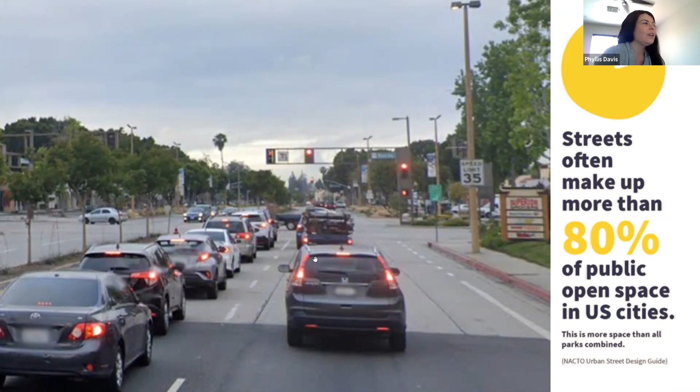But our transportation system moves more than just vehicles. It has the potential to foster economic activity, improve public health outcomes, serve as a front yard for our residents, and really just provide a safe place for people to get to where they work, play, live, and learn, no matter what transportation mode they choose or use.

So looking at our streets from a multimodal perspective, we're able to give people options so they can safely, attractively, and conveniently move by foot, by bike, by transit, by any type of mode that they see fit. But the street designs, policy plans, and recommendations that we develop ultimately affect how our communities are formed and how our people choose to travel.

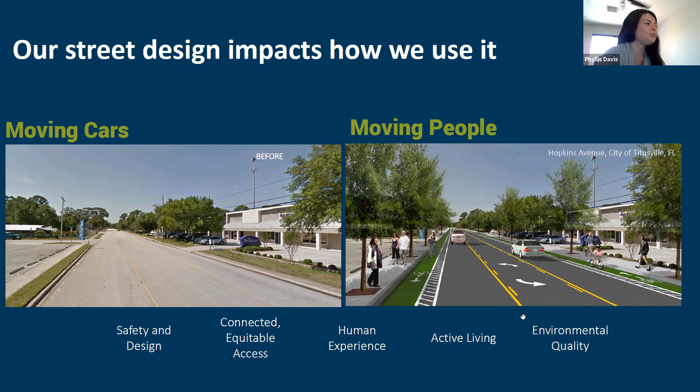By also shifting our focus from moving cars to moving people, we can also make our cities more efficient. When we look at streets, typically we measure how a street is performing by how many cars it moves. But if we shift our perspective to how many people we can move, we can start to reallocate the space within our streets.

Assuming that we have maybe 2 passengers in a vehicle on a single driving lane, one travel lane can carry about 600 to 1,600 people an hour, whereas a dedicated bus lane can carry up to 8,000 passengers per hour. So it's a very big discrepancy and difference in how many people you can move by what travel mode you use.

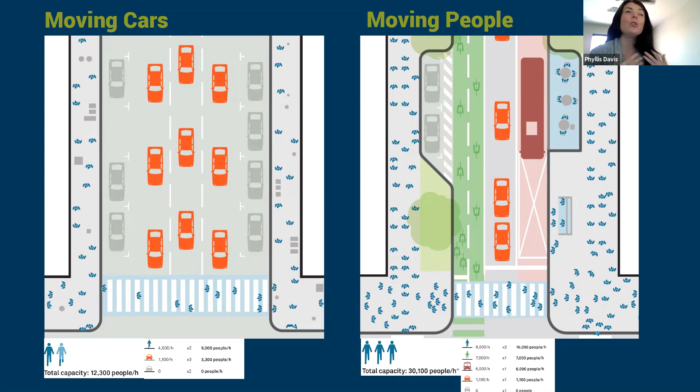So this scenario not only increases the capacity of the street, it also allows us to have more space for seating or amenities along the sidewalk. So maybe trees or plants or public spaces. And it's important to keep this in context as space in our urban areas is increasingly becoming scarce. We need to really rethink how we're using our streets to maximize the efficiency.

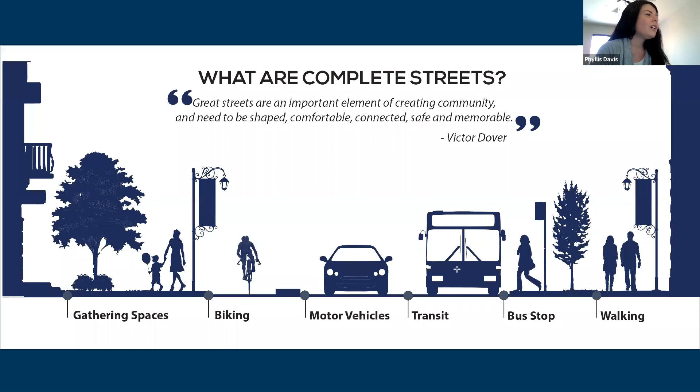Streets are also catalysts for urban transformations, but they need to be developed to the unique user and land use needs along a corridor. You'll probably have heard of the term complete streets. Well, complete streets moves away from that vehicle-focused design to really incorporating the human experience into the street design. It provides multimodal connectivity, but it also helps to improve the aesthetic, social, economic, and environmental needs of the community.

So what makes a street complete? The concept of complete streets is really placing the same priority on pedestrians, bicyclists, and transit as it does on motorists. It incorporates a wide array of amenities that improve access for all users, regardless of your age or ability. It really tries to create one cohesive space within the pedestrian and roadway realm to allow users to safely and conveniently travel.

But the context of a street is also crucial, and it's often overlooked when we're designing our streets. One size does not fit all when it comes to complete streets. So we really need to look at what the land use surrounding our street is and what the needs of the corridor are. So let's look at some examples of different scenarios of a complete street and how they're tailored to different land use contexts.

So it's really trying to convert that space to also provide access for other users. So we can prioritize pedestrian facilities, bike facilities, and transit facilities that really help all people move through that corridor.

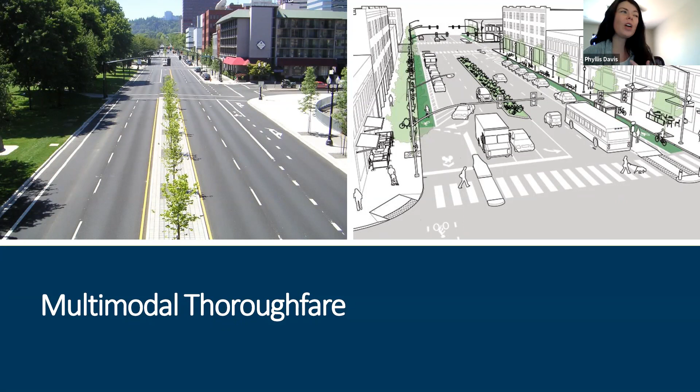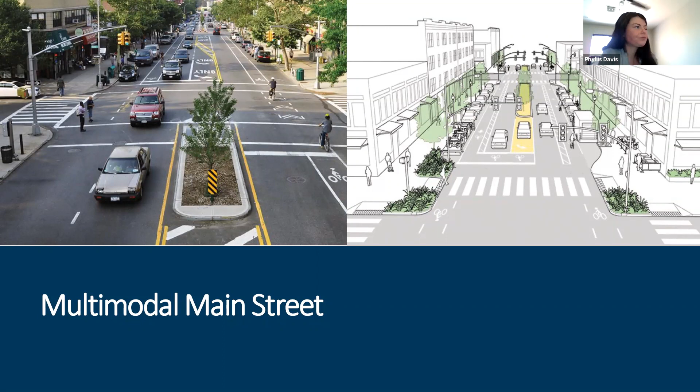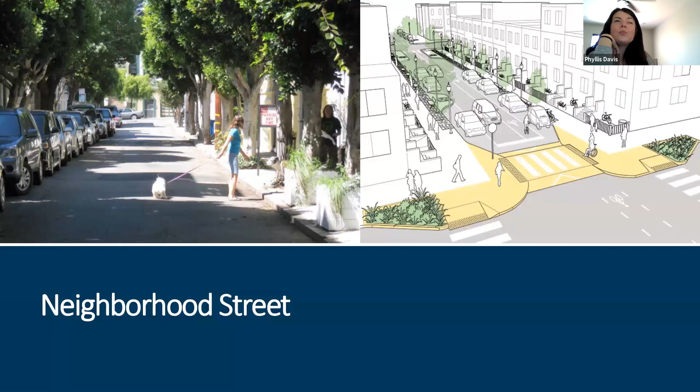There's also commercial alleys, shared streets, and paseos. These can be designed to play an integral role in really making connectivity easier for pedestrians and cyclists in the downtown area. Shared streets maintain vehicle operations through them by promoting just low speeds through the area. These could be used just for loading or unloading during designated hours. Another idea would be creating a pedestrian-only space. And I think there's a lot of opportunities to reconvert some alleys currently in Baldwin Park into these great shared spaces or paseos.

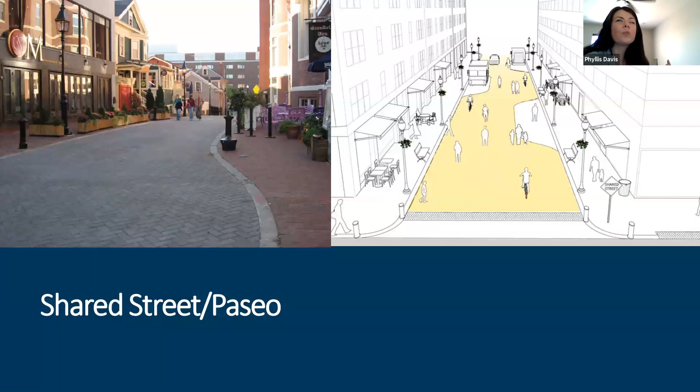But no matter what type of street we have, a critical element to looking at complete streets is providing equitable access to our residents. Vulnerable population groups such as limited incomes, the elderly, or persons with mobility limitations are more likely to lack alternative modes to vehicle travel. So that may limit their access to jobs, healthcare, social interactions, or healthy food. So creating access that is reliable and affordable can help address some bigger community concerns that we have, such as poverty, unemployment, and public health concerns such as obesity.

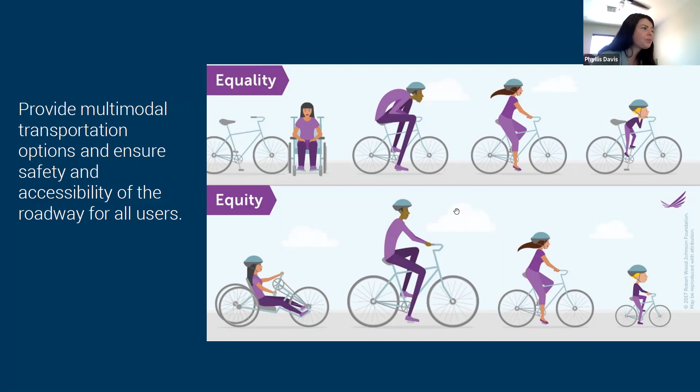And one of those key components of equity and having street connectivity is the overall design and how connected our network is. Well-connected streets bring destinations closer together, they reduce travel distances, they help improve access, and really ultimately they just create a better sense of place. So if you look at Baldwin Park today, Ramona, Baldwin Park, Pacific, and Main really serve as the backbone of our transportation system. But there's also a network of smaller streets that improve connectivity and access. But in today's current superblock development, there is some limited east-west access.

So, for example, if I live in that dot in the upper left-hand corner and I want to go to the retail shopping center, I have to either travel north to Clark or down to Ramona to drive to that retail center. It may not sound like a big deal, but during peak congestion periods, this just really adds additional stress to our street network. It also can potentially limit our pedestrian and bicycle access as well. So dividing these superblocks can really allow for additional movement through a downtown area.

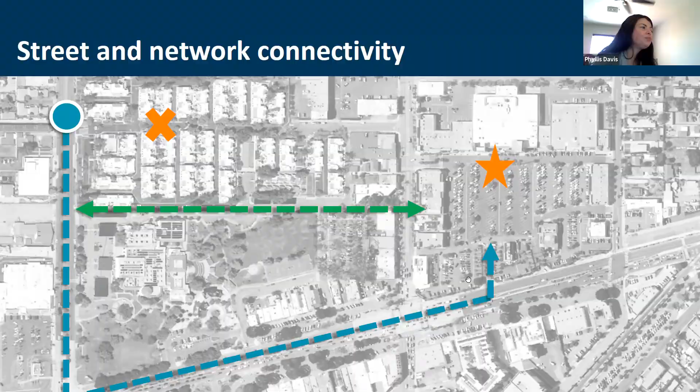Another great way to improve access is to use our alleys and streets. The alleys between Ramona Boulevard and the Metrolink station are a great example of how we can convert that space into a lively pedestrian alley that encourages and entices people to get off the train and to come to downtown Baldwin Park. Connections such as this help create a stronger grid-like system, and it just makes the blocks more walkable and helps promote urban development.

And even if a street is connected, we need to make sure that we are designing the streets to incorporate the safety of users and their perception of safety. How someone perceives their safety, whether walking, biking, or using transit, is critical to whether they choose to use that mode or not. For instance, if you're a confident cyclist, you might not be scared or intimidated to ride on a major roadway. Whereas a family with children, or honestly myself, requires a bicycle facility that has a little extra protection, safety, or comfort.

So selecting the best bikeway facility on a given road can be really challenging, but we look at a range of factors that influence a bicyclist's level of comfort and safety. The image on your screen shows a continuum of different types of bike facilities, from least protected on your left to the most protected on your right. The shared lanes on your left can be used on streets that have low volumes or low speeds. So really in Baldwin Park, we're looking at those neighborhood streets, or just low volume, low speed streets.

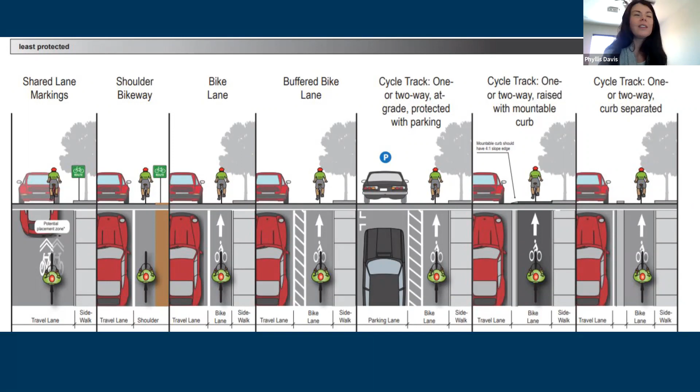On your screen, you can see a few examples of what that cycle track or separated bike facility may look like. So you can see it's really physically separated from motor traffic, and it's distinctive from the sidewalk, so you aren't having conflict between your different modes. These truly just provide a dedicated space for cyclists and improve their overall sense of comfort and safety.

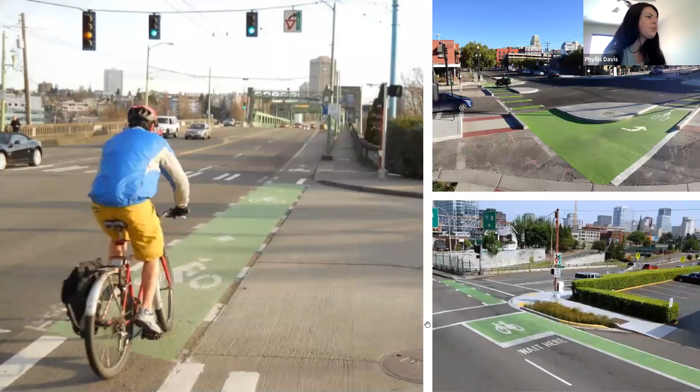But it's really important that we also identify for these facilities the improvements at intersections. So this is where you can have conflicts with your cyclists, your pedestrians, and your vehicles. So you want to heighten the level of visibility and heighten the awareness between the competing modes. The protected intersection on the upper right-hand corner sets the bikeway back from the motor vehicle traffic, and it provides a dedicated space to allow the cyclist to travel through the intersection, giving them an extra sense of comfort and also giving an awareness to the drivers of, I have to look for a cyclist in this area.

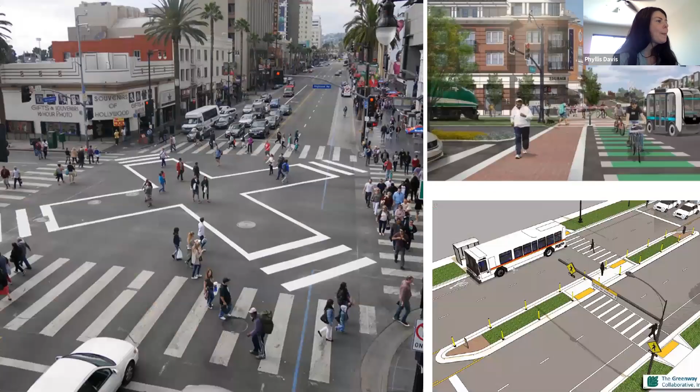And we also have to look at it from a pedestrian's perspective as well. So our intersections need to be accommodating of crossings that allow pedestrians, no matter if they're able to walk, if they might have mobility limitations, or if they're in a wheelchair. We need to make sure they're able to cross the corridors and have safe, convenient access.

The image on your left shows a scramble. These are used in kind of high activity centers. So something maybe in the future that Baldwin Park, as it develops, may want to look into, where pedestrians are allowed, at their designated time to cross, to cross diagonally instead of going just straight parallel across the road.

And of course, this is a transit-oriented development project, so we want to make sure that we're creating a high-quality transit network. A strong public transportation network is really key to having a great transportation system. As congestion continues to increase, creating this transit network allows more people to move, and we can really reutilize our public space to move more people.

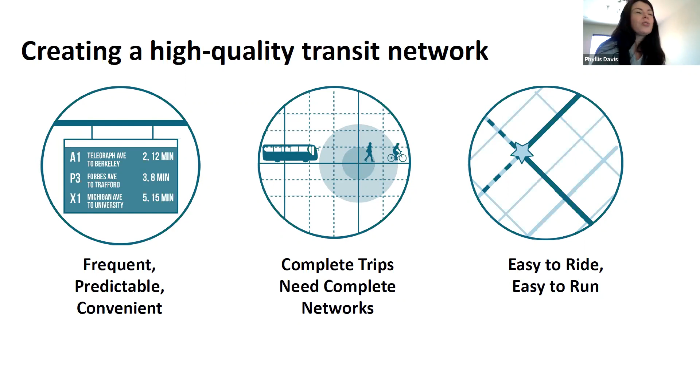Currently, Ramona serves as both a local and regional transit route. So we want to develop a system, particularly on Ramona, that is easy to use, easy to connect to, and is frequent, reliable, and convenient for users. The transit services that are reliable and efficient bring more people to your cities. If it's slow and inconsistent, it could actually discourage ridership and really jeopardize the local benefits of having a public transportation system.

The images on your screen show some examples of how we can accommodate buses within our system to have it be more frequent and reliable and convenient. Time spent for buses waiting at signals or at stop signs can really delay transit use. Bus bays like we have currently today in Baldwin Park, while they're really great for vehicle traffic, they really slow down buses, because once the bus is finished boarding or alighting their passengers, they must wait for breaks in the traffic to re-enter the road.

So there's numerous ways to improve the frequency and reliability. Since bus bays prioritize vehicle movement, we can have curbside floating bus islands or bulb-outs that allow a bus to quickly pull up to a stop and passengers can board the bus. These stops can also be designed to allow level boarding of passengers, so we wouldn't have to put down the ADA ramp. It could just simply roll onto the bus.

But the transit experience doesn't stop just at the bus stop. Stops and stations often are where existing and potential riders first interact with the transit service. So having a bus shelter is really critical to the overall transit system. We need to have safe, dedicated, and comfortable spaces. They also allow the city to provide opportunities to integrate placemaking concepts, have wayfinding systems, or help really build and promote transit usage.

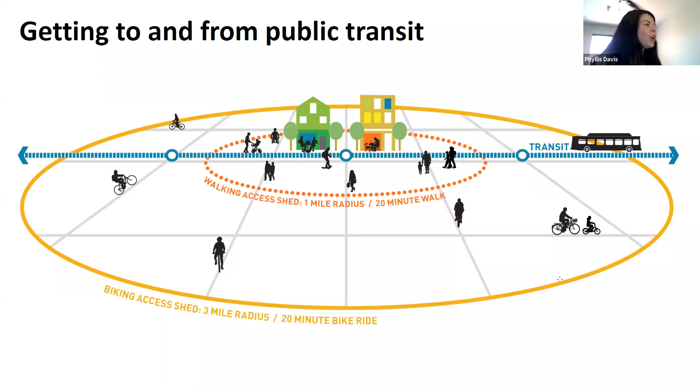So one really great way to extend the reach of the transit system is to integrate new and shared mobility strategies into the system. Recently, the town installed a shared use electric bike program that includes stations at Morgan Park, City Hall, and the Metrolink station. These electric bikes make it easier for people to travel long distances and really just help create a fun, active experience for residents and visitors. Across the nation, these e-bikes and electric scooters are becoming increasingly popular.

But we want to make sure that when we install these facilities, we actually incorporate safety measures as well. So think back to the different bicycle facilities we talked about earlier. For these types of technologies, we would want to have more of a buffered or protected bike facility, so these e-bikes can really travel safely without conflicting with vehicles or pedestrians.

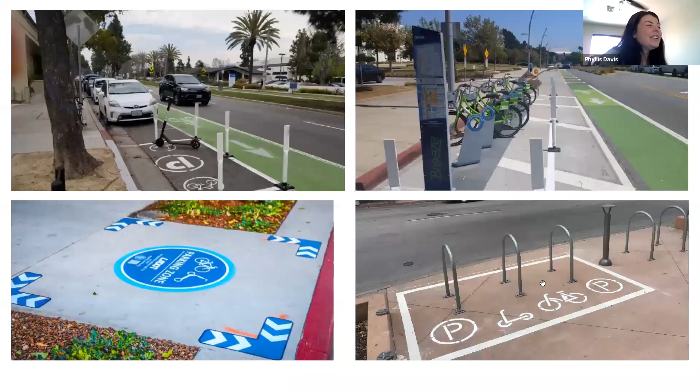But this is the one thing that we don't want to see when we install an e-bike program or e-scooter program. Having a scooter or a bike on the side of the road is just really one of your first steps of getting a public complaint at City Hall. So this is definitely what we don't want to do. So allocating designated parking spaces at smart and strategic locations makes it easy for everyone to conveniently park their bikes or pick up a bike.

This screen kind of illustrates a few examples for agencies in Southern California and across the country, how they're designating parking spaces for these e-bike programs. So you can see these could be in your current bike racks, or it could be designated space next to your bike facilities or on your curb.

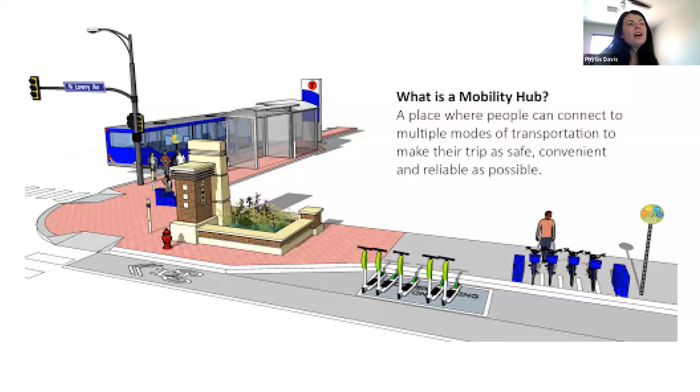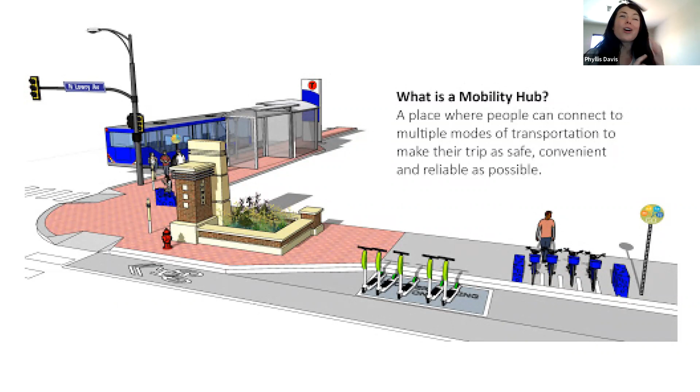And a great way for coordinating all of these modes is to develop mobility hubs. Mobility hubs are really just a one-stop shop that connects all of the variety of modes, whether it's walking, biking, transit, or shared mobility, or car share as well. They all just come together in one place.

These could be really large or ornate facilities, but it could also really be simple spaces like those seen on your screen. This just incorporates your bus stop, your bike share program, wayfinding, and placemaking. So it just creates one common place that I know when I see these facilities, I'm able to either bike, walk, or take public transportation where I need to go.

And mobility hubs can also have some extra amenities to really promote walking and biking. Some ideas that I've seen across the nation are having bike repair stations, interactive directories so people can look up restaurants or retail stores, or integrating a charging station so people can charge their phones, their computers, or their electric scooters. And another really great idea that people are using is developing a micro-transit system or a free shuttle system.

And this really extends not just your public transportation reach, but the reach from visitors and residents to Baldwin Park. Currently, LA County has a 3-year pilot micro-transit program at 6 service locations throughout the metro area. So micro-transit is essentially combining an Uber and Lyft type ride sharing with public transportation. So I would use an app and I would be able to hail a ride, and a bus similar to the one on your left would pick me up, and then it would pick up riders along the route to drop us off either at the bus stop or a mobility hub.

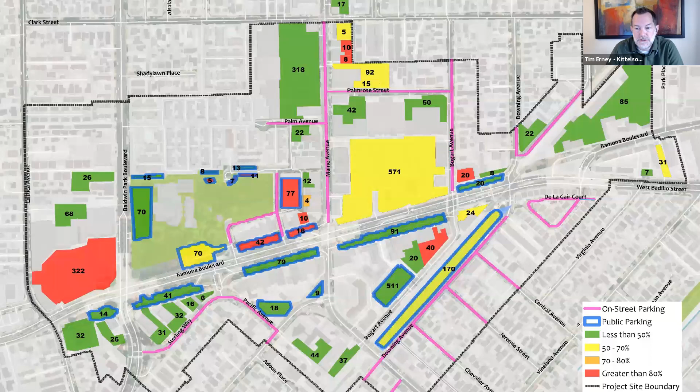But instead of just removing parking, going through and just taking parking away, we want to look at ways to efficiently park our neighborhoods and to make sure that parking is being provided in an efficient manner. And we want to look at what's the highest and best need for parking. So we look at, first of all, developing parking management strategies. And the first one of these that we look at is called shared parking. And shared parking means that a certain parking space can be utilized by different uses over the course of a day. Large blocks can be consolidated to serve multiple businesses in this location. And shared parking is especially effective where you have mixed-use developments.

An example of this would be an office building sharing a parking lot with a restaurant or a movie theater, since a lot of the office workers and their cars are gone in the evenings when you have that higher demand for parking from the restaurant or the theater. So as an example on the left, imagine if one of those buildings was an office building, one was a movie theater, one was a residential. Instead of having separate cars parked for each building, you could reduce that amount of parking by a pretty substantial percentage and have less parking spaces available.

And the graphic on the right shows the reduced number of spaces that could be required in a theoretical model versus on the left, it's the unshared parking. So what the parking demand would be for each use treated separately. And on the right, how those spaces and the time required for those spaces overlap. And as you can see, if you do individual parking, there's over 1,800 parking spaces that would be required, whereas if you did shared parking, that number could be reduced by about 34%.

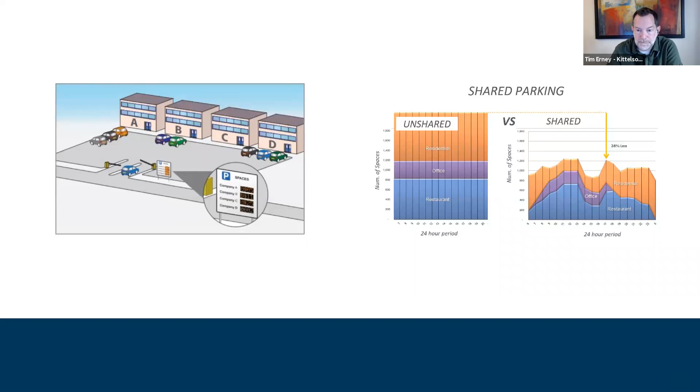Next. So if you are able to reduce the amount of space provided to parking, there's a lot of things we could do with it. We can create some very vibrant public spaces, and this can include things like parks, parklets, space for farmers markets, retail kiosks, locations for food trucks, restaurant rows, mobility hubs that Phyllis mentioned. And the thought behind this is to take these public spaces, because in fact, streets are public. A lot of the parking in downtown Baldwin Park is public. So take these public spaces and repurpose them for the public to enjoy in other ways.

Next. So in addition to looking at shared parking, there's also opportunities to relook at how we're treating the curb. So we want to develop a curb management approach. And this is a plan that allocates the spaces on the curbs for a variety of different modes. So in addition to the people using the sidewalk, the curbs itself can accommodate things such as on-street parking. It can do pickup and drop-off areas for shared rides like Uber and Lyft. It can be areas to charge electric vehicles and a bunch of other things. This is all stuff we can do with the curbs if we're not providing just simply dedicated parking.

Next. So one concept that has really become more popular across the country is the idea of curbs as flexible zones. So instead of just having a complete row of on-street parking, looking to see what else can be done in that space. So this is a plan from the city of Seattle that shows how they swapped out their definition of a curb space into a flexible zone to account for all the different needs that curbs have. So this can accommodate different transportation and non-transportation options. So there's areas for passenger pickup and drop off. There's areas for deliveries, such as an Uber Eats type of a thing.

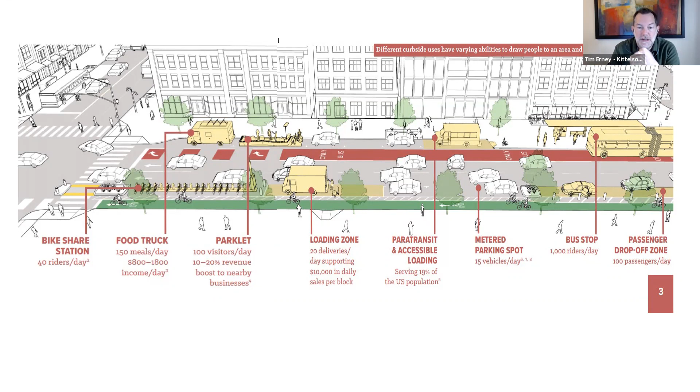So in addition to looking at shared parking and changes to the curb, we also want to look at smart parking. In other words, how can you better improve the efficiency of individual parking spaces? So smart parking can use in-ground parking sensors, cameras, or counting services to identify the number of vehicles coming in and the number of vehicles coming out of a lot, and identify which spaces are available for use.

And you can see these sometimes at large parking garages, like at airports. You'll see they have a little light above a parking space to show that parking space is available, or there'll be a counter in the front of the parking garage that shows which level has parking available on it. So these kind of dynamic signs, dynamic lighting, and information systems are really beneficial to users and can help, once again, improve the efficiency of parking. So in addition to that, there's also secondary benefits.

So there tends to be less traffic because there's less traffic from cars circling around a neighborhood or circling around a parking lot looking for parking. There's less time that it takes to find parking, which can reduce stress for drivers. Roads are safer because since you know where your parking space is going to be, you're not going to drive slower trying to look for parking and maybe miss a pedestrian or a bicyclist going by.

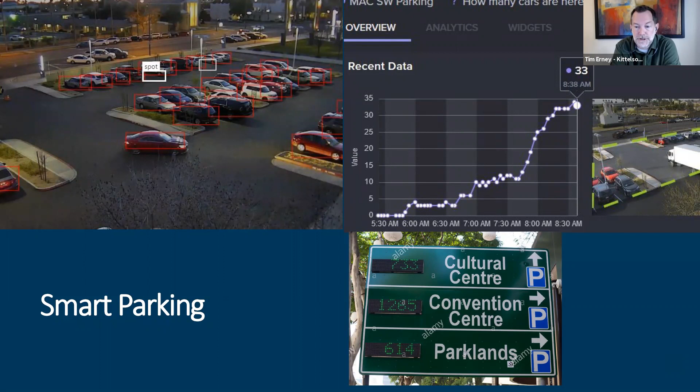In addition, the data is really beneficial for cities because they could use that to look at trends, to see where the parking hotspots are, to see how much parking is needed to provide for various uses, and to make really good informed decisions about the future of parking in a neighborhood. So that covers parking. And the last thing we want to talk about today is new technologies.

And these are what we call transformational technologies. And there's a couple different categories of this. First, these are things that are evolving new applications of science, engineering, and societal organizations, transforming how people and institutions use land and transportation systems, and collectively how they influence how people use right-of-way, curb space, and transportation facilities.

So some examples of transformational technologies are connected vehicles, automated vehicles, electric vehicles and hybrids, adaptive traffic signals, and these are ones that change the amount of green time based on the number of cars that are coming, managed lanes, so using different lanes or different directionality of lanes throughout the day, variable message signs, that could be the parking signs mentioned earlier, or even signs that tell people to take a certain route because of traffic. Even things such as 3D printing and drones, microtransit, like Phyllis mentioned, bike share, these are all transformational technologies.

So next. So our focus here, though, is really looking at what we're calling mobility as a service. And this is basically looking at transportation as a utility and not just something that's private ownership. So think of it as moving away from each person owning their own vehicle to using different mobility options to meet the travel demand.

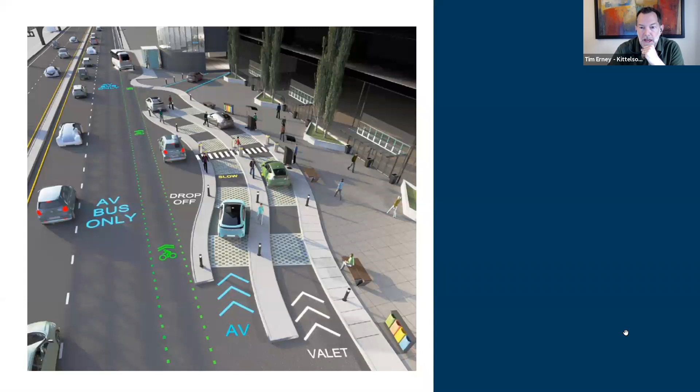So next. And here's kind of a fun example, because we're looking to see how these kinds of transformational technologies are going to change the way we design streets and design curbs.

So for example, if we have a fleet of automated vehicles, we may not need to provide as much parking because these automated vehicles will be traveling around throughout the day and not need to sit there, right? And then also we would have to look at curbs.

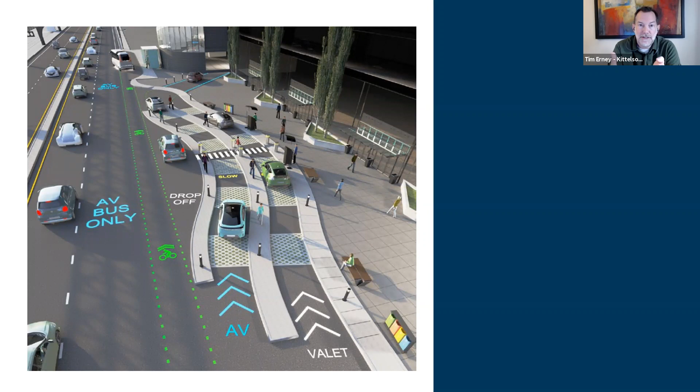So if you had just streets that Phyllis was showing earlier, but now we have more of a connected environment, maybe we would have a separate drop-off lane for automated vehicles. They could then pull in safely, pick up their passengers and drive away. So these are the kind of things we're starting to look at now in terms of designing our curb spaces.

So we're still, though, in the process of identifying what are the impacts. As I've said, they're starting to be rolled out, but we still have a long way to go to have a true kind of mobility as a service mentality. So we're still doing research as to what are going to be the effects of these and how it's going to change our land use patterns, how it's going to change our codes and standards,

and how it's going to change how people move. But one thing we do know is that the applications of the technologies will have a greater impact than the actual technologies themselves, because these applications change every day and the market's still trying to figure out who's going to be the winners and the losers.

So as an example, about a year ago, a lot of cities implemented dockless bike share. So these were locations kind of like Phyllis had shown, where instead of scooters, these are bikes, and the same kind of issues, people were just throwing the bikes everywhere, but that's what everybody was trying to do. Now they're not going in at all. People have moved over into scooters. The point is they're still looking at mobility options, but they're not being wedded to a specific technology.

In addition, Uber and Lyft, to be honest, they don't really have sustainable business models. And especially in today's environment where people are afraid of taking shared ride services, those two companies themselves may not be around, but the idea of shared ride services is something that's going to last.

So when we plan for our cities, we need to be not thinking about just the actual physical, it's an Uber, it's a Lyft, it's a Lime Bike, but what are we trying to achieve and making sure that we're accommodating those. So studies have been, though, varied about what the effects are going to be. We've been doing research on automated vehicles. In reality, the results are all over the place.